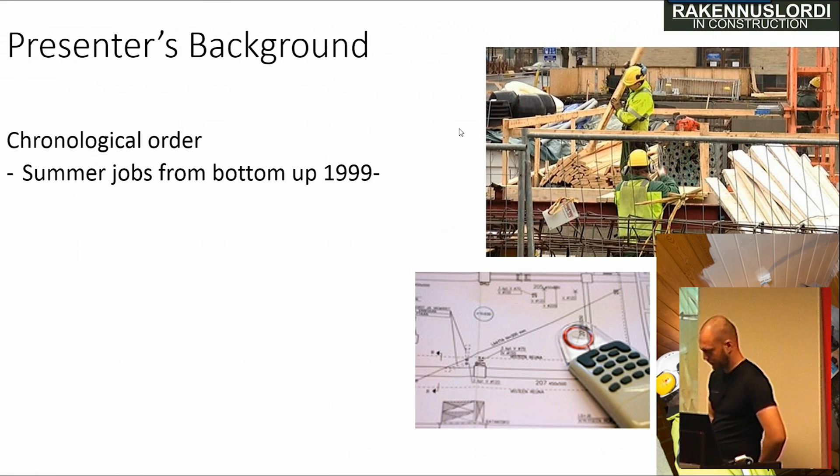So once I started studying to be a Master of Science in Construction in Finland, I used the first summer times to work at the construction sites in pretty basic tasks like construction worker, quantity surveyor, and eventually foreman. The next step was in 2003 when my professor asked me in the school, hey, tech student, are you in need of some pocket money? And obviously I was.

So two weeks after that I was creating and controlling schedules in this huge Kamppi Center project. Of course I didn't do it on my own because I just started. I had a good team to back me up, but I was the one doing the dirty work. So that's where I got in touch with Control Chart and the software that is now known as VICO Schedule Planner.

Next step was in 2005 when Graphisoft bought the company where I was working, which made the scheduling software. And so BIM, we made the first BIM pilot in Finland for SRV in Espoo. But in that we were only responsible for the BIM side. The guys at SRV handled scheduling and production management.

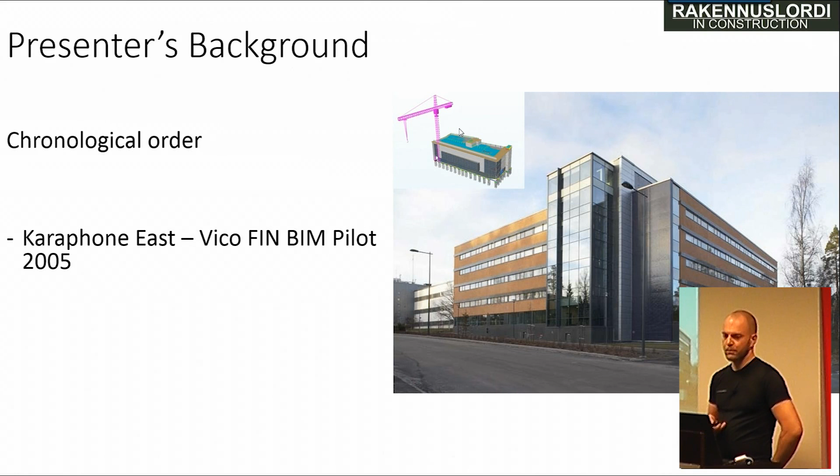Then I graduated in 2007. My master's thesis was about scheduling, and my special assignment, which is the next step down from master's thesis, was about BIM and utilizing it basically. After I graduated, I figured out that I don't want to be profiled as the technical guy who's clicking software, so to speak. So I went to real construction projects which are normal scale, normal size, and I was working there again in basic routine jobs as a site engineer and site manager and so on.

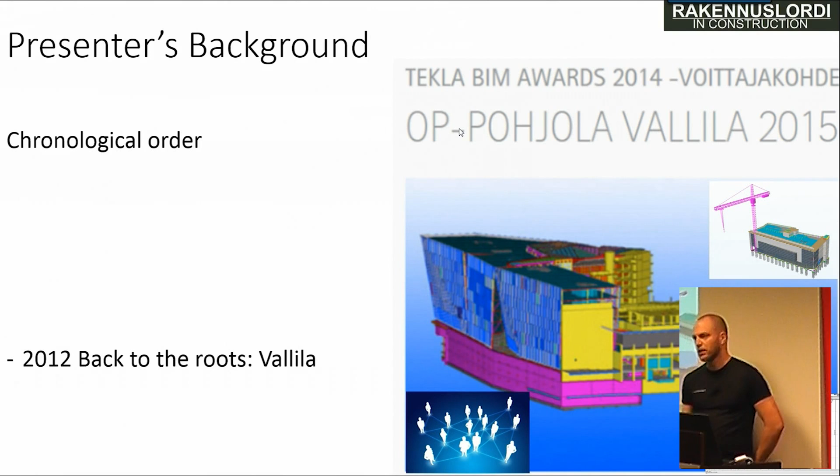So that took 5 years, and in 2012 I sort of came back to the roots in the BIM and scheduling scene and was working in this project, which you might know. I was the guy responsible for scheduling and BIM at the site. So pretty much everything that's done in the site is my handwriting and my colleagues'. And last summer I became an entrepreneur.

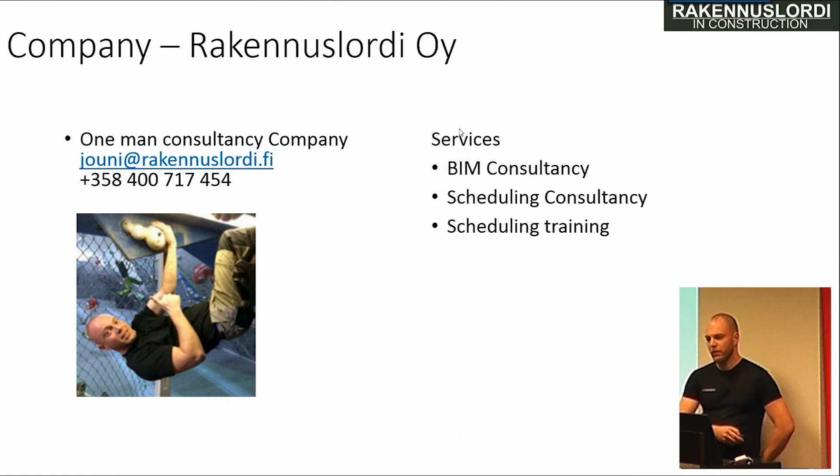And what I do today, the variety of stuff that I can do is a lot. And it all has to do with either BIM or scheduling or both. And when you combine these, it all boils down to information management. So that's, I think, where my work is going on now. And with the guys in my close circle, we've tried to figure out new ways and find new equipment to be able to more efficiently benefit from BIM and to be able to collaborate and communicate with people.

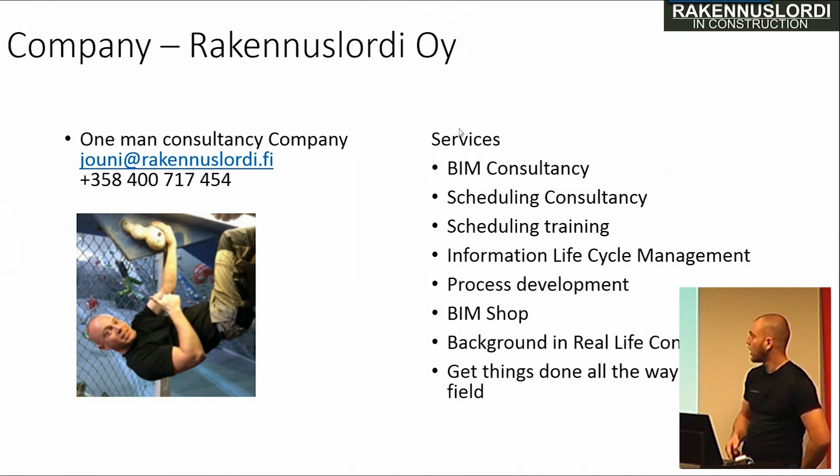And so in short, I have a constructor's background, which is different from pretty much every other BIM consultant in Finland. They are either designers by background or software company people. So I actually know what living in the site is. And my tendency is to make things happen to the very end. Make sure that schedules that we do will actually be implemented, not just leave them floating and hoping that maybe somebody else takes care that they will be done. So that's for the background.

And the contents of my presentation is pretty much showing real-life examples of how to do scheduling and BIM. And I'll also be using the Tekla house that you saw just a moment ago in Sampo's presentation, because it's simple and easy, and it's easy to make the point quickly. So let's start by getting people acquainted to our construction site.

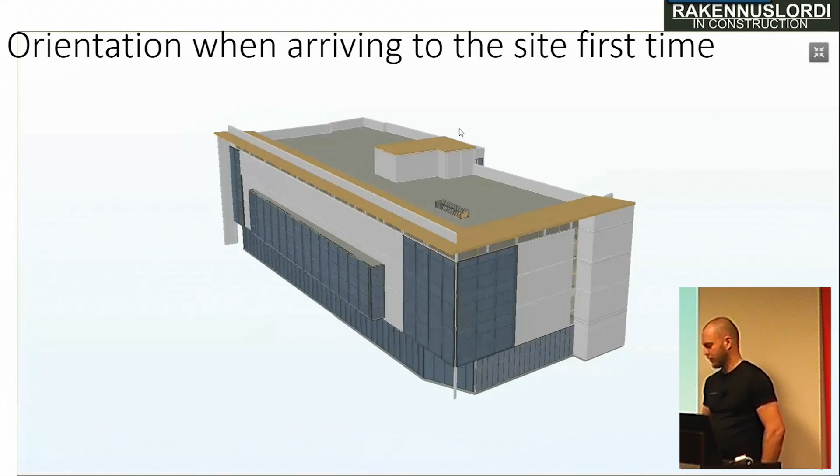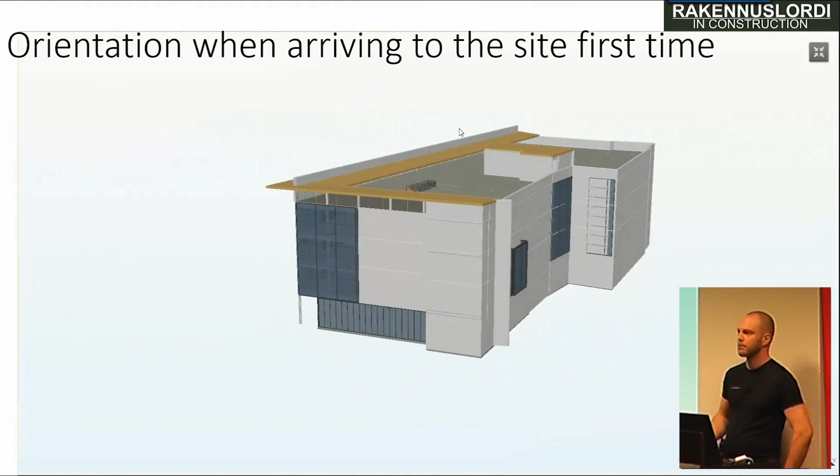Let's say a facade contractor, we've done the contract and the crew is coming to the site, and you should be able to communicate to them what the site is all about and where your work should be done and in which order. So you can either use 2D drawings or just explain and point at the site, or you can use BIM to make it transparent and obvious what we're building.

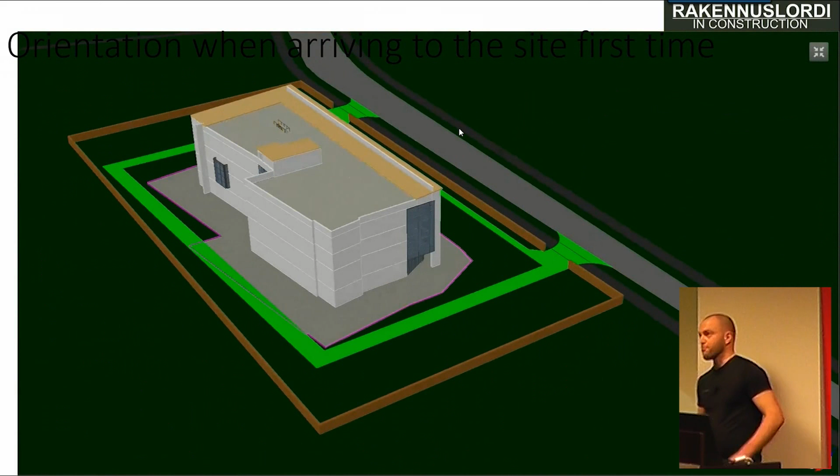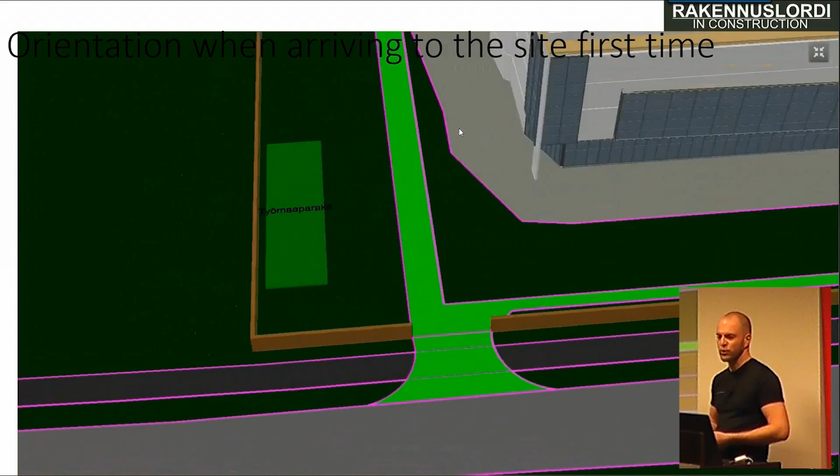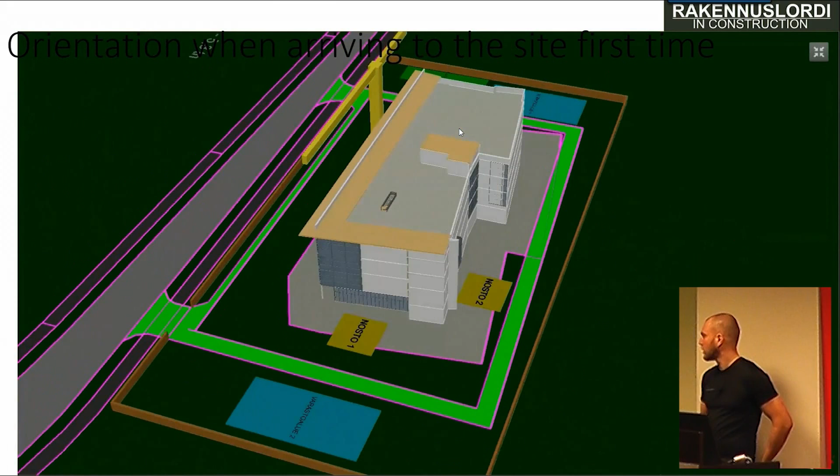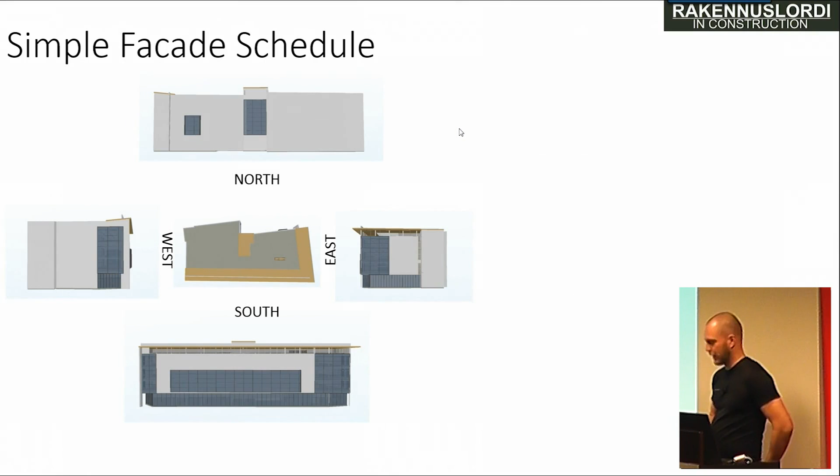So now that the facade contractor's crew know what our site is about, let's go through the schedule. That actually is the top view of the building that we just saw, and then you divide it into different locations to be able to manage your work. And then based on that, it's pretty simple to make a flow line schedule where you have the different locations here and then the order in which you're doing them.

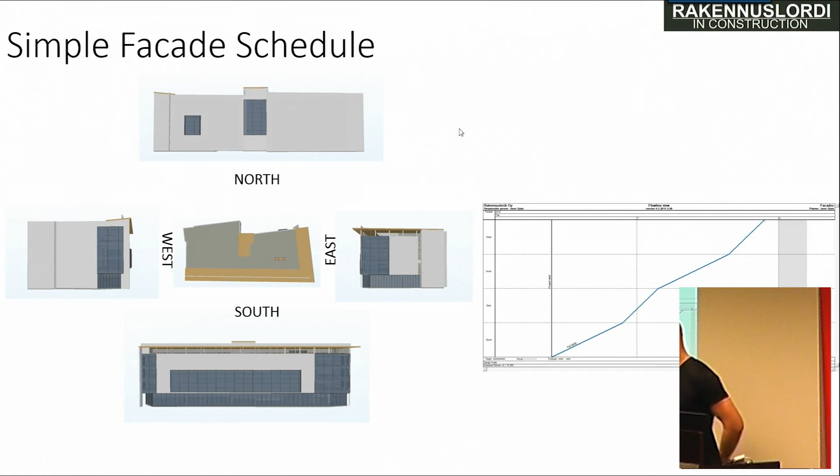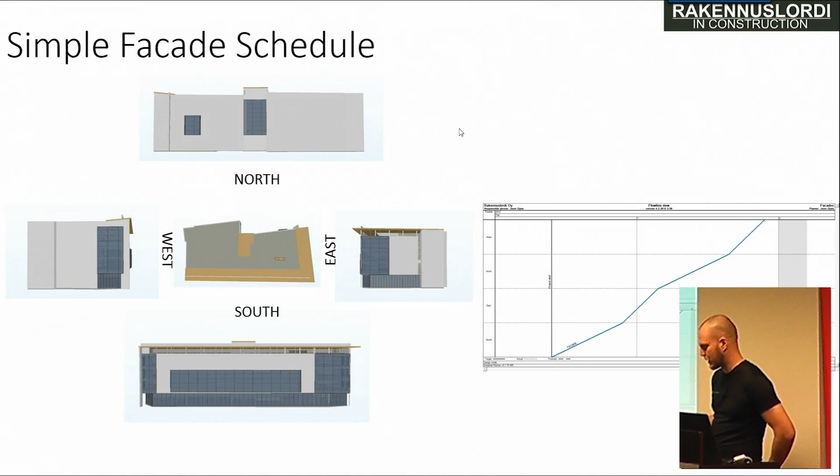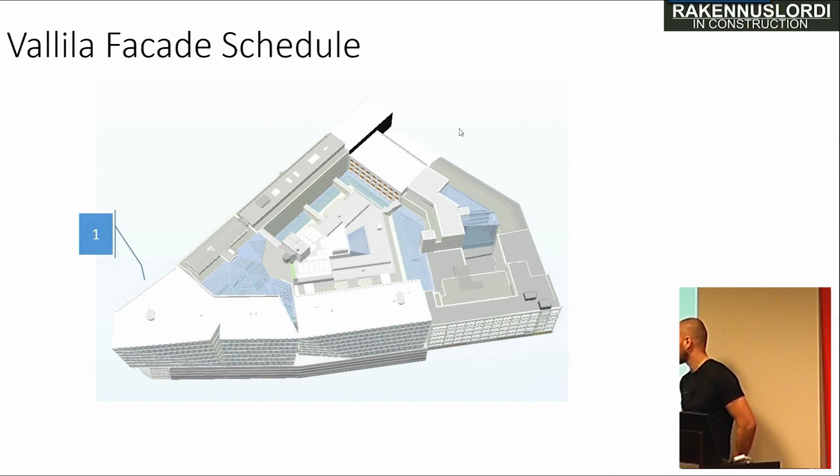And the production rate or the duration of the task varies because, well, the quantities in the facades vary as well. So that's the simple idea. Make the guys understand and explain, then it gets easy. So to the real life example, this is the Vallila site, and its facade schedule consisted of about 15 different facades. Let's see if I can get this working.

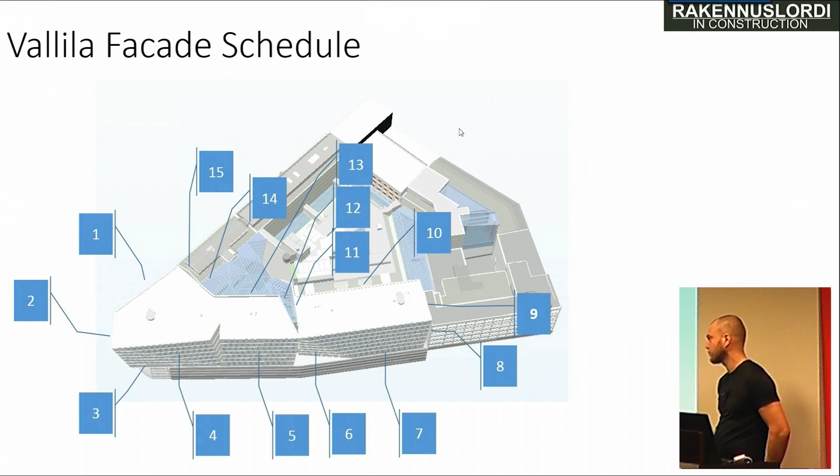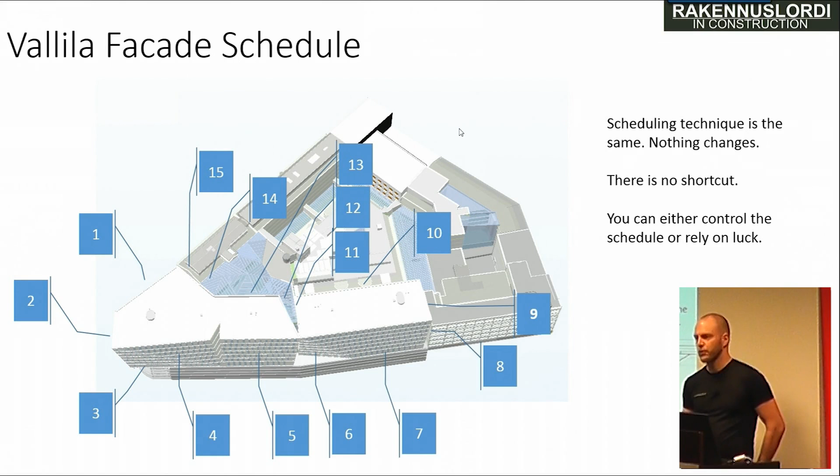So it's a lot more complicated, and the funny thing is that a lot of these facades are slanted. They are not straight, but they are leaning outwards from the building. So there you need special equipment to be able to work on the facade. So that's why, for example, here we have two. And then the schedule, how you should do it, there is no alternative or quick way around things. The mechanics, how you do it, is just the same, but of course the schedule will be more complex.

And at this point, how can you communicate this schedule to the guys who will actually do the work? Then the BIM model and the visualization of it becomes very beneficial. It makes things easy, and you can actually make sure that they understood the issues the way it's meant to be understood.

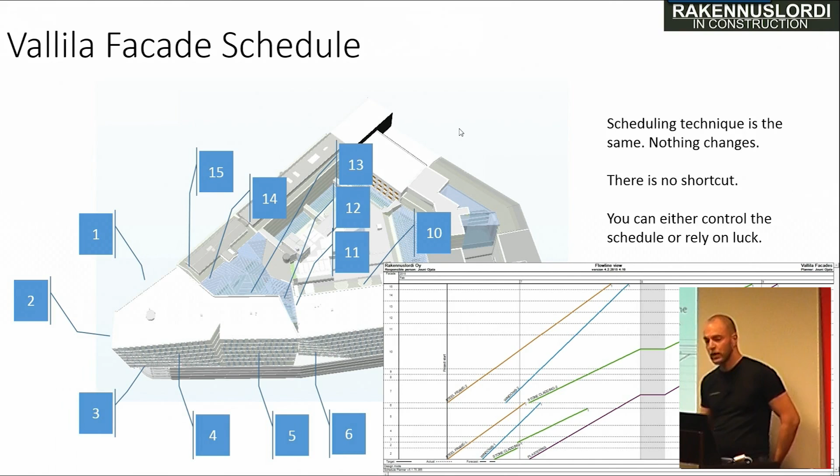Okay. Next, the scheduling procedure in this big project. How we did it is, well, by the books, as I like to say, according to the theory and according to how you should be using that control software. So it all boils down to starting with some quantity that your scheduled task is based on. Then you have some knowledge telling how many men achieve how much in a day.

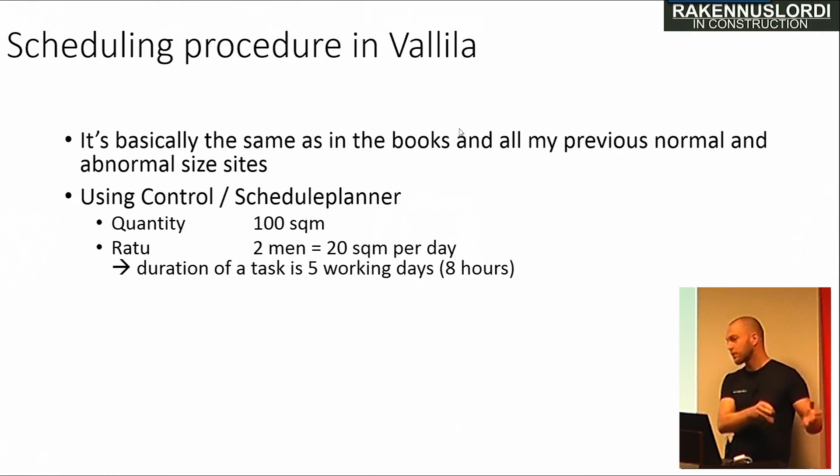For example, we in Finland have this Ratu data file system, which tells, for example, that for plasterboard walls you need 2 guys and they make 20 square meters per day. And that's how you get the duration. And the location is, well, the most critical thing in production control. Because only when you get one room done, let's say painted all the way, only then you can start installing carpets there, or otherwise you need to protect them somehow, and that again costs money and time. So one location at a time in a predefined sequence, and that's how it goes.

So this is what we did ourselves first, because at the start of the project we probably know like 2 of the contractors that will be working there. There will be 80 more, but the contracts will be made only a lot later. So we have to make the first guess of the schedule, even though I'm not an expert in electrical installations, for example. But still I need to figure out what kind of tasks the electrical contractor needs and how long they should take, and then I need to figure out some quantity the durations are based on. So that's how it's done first.

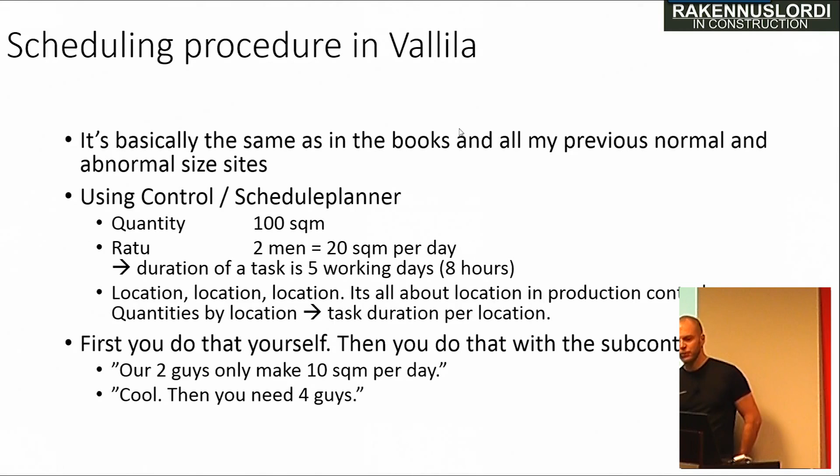Okay. Back to the whole project itself. It's a banking block owned by OP-Pohjola banking group, and there are altogether 10 buildings, of which half were renovated and half were demolished, and of course new buildings built in their place.

And the main parts of the project were the newly built houses on this side, and then the so-called gallery area. The whole inner yard was to be glazed with a glass roof all the way. And then last but not least, one simple building where almost every wall was straight. That was given to a general contractor to do sort of on their own.

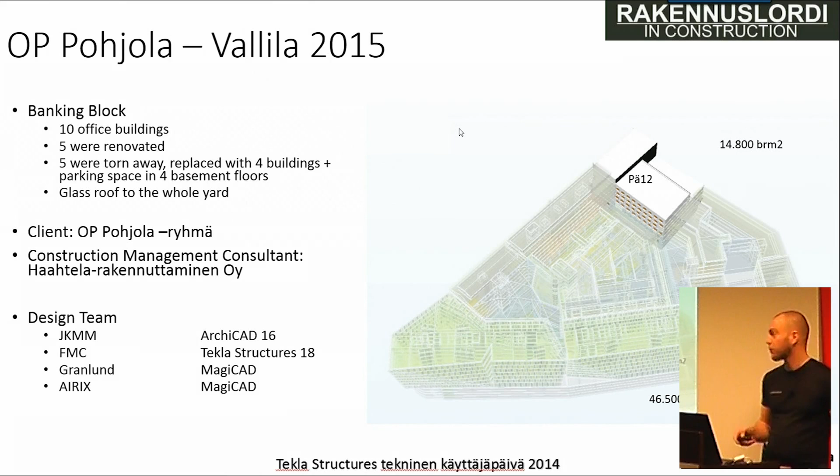So that's the project, and the design tools used there are the pretty standard ones that we use in Finland. And we actually used these ArchiCAD and Tekla Structures on the site as well for our own purposes, refining modeling at the site.

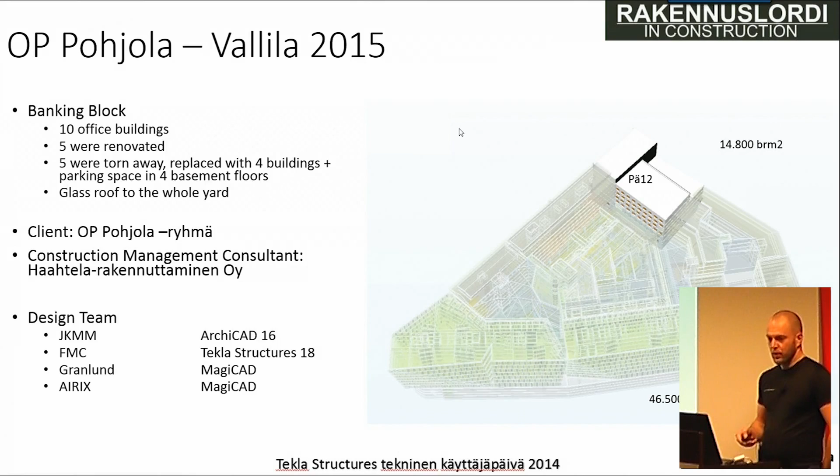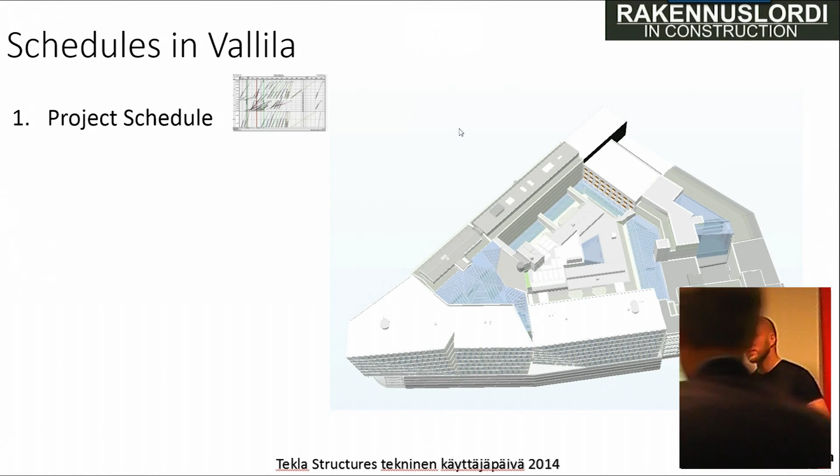So, how did we schedule everything? First of all, we started with, of course, the project schedule, which consisted of everything that's happening in the whole block from day 1 to deadline. And once we got closer to the moment when there will be hundreds of people and a lot of tasks going on at the same time, we needed to split the schedule into smaller pieces.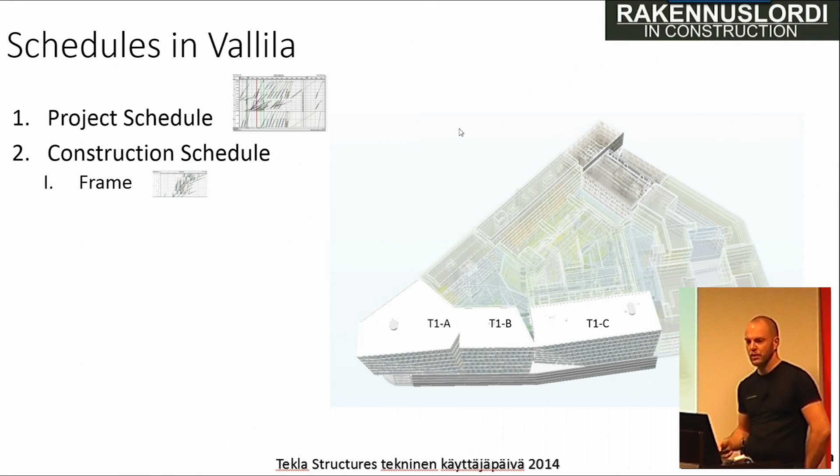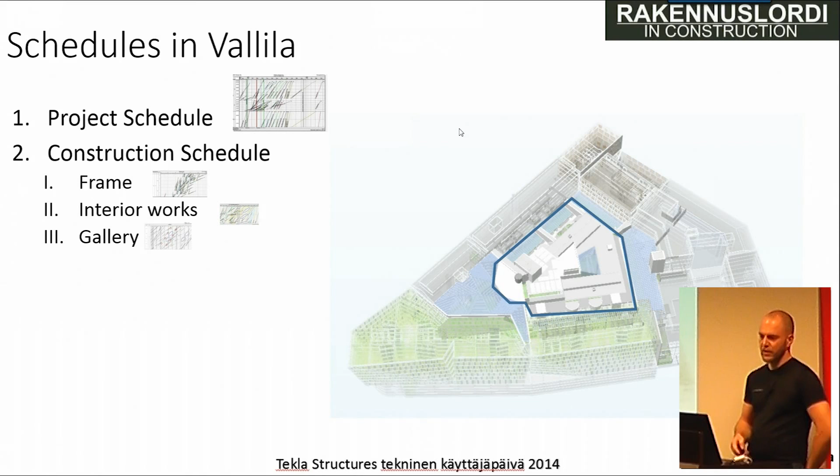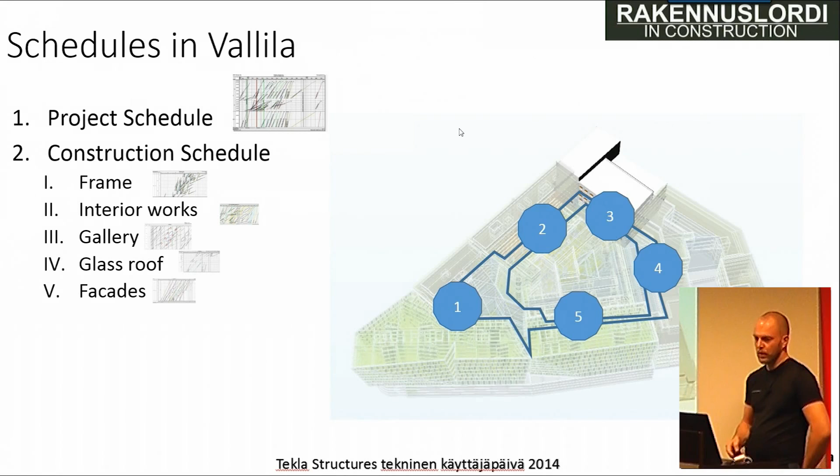For example, the frameworks of the newly built buildings, then the interior, which is obviously the same as in the frameworks, but we combined these 2 locations here. We did some calculations and figured out that it's more efficient to do it that way instead of doing A and B block individually. The gallery, we made our schedule for that, and the glass roofs as well, we split it into 5 different zones and managed it that way. And then again the facades, which you already saw. So that's pretty much how it's done.

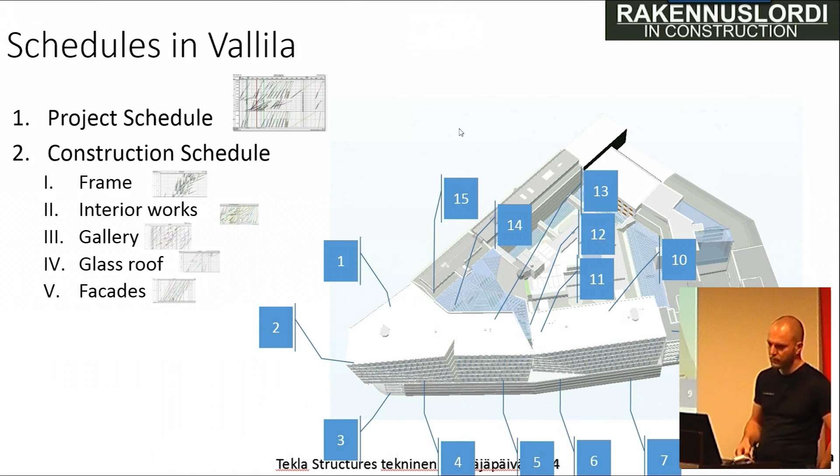It's beneficial to, as long as possible, have everything in one single schedule, because it means one file. And one file with control means that you can manage all the dependencies between different parts of the project inside the one file. And after you split it into many subschedules, these are separate files, and there still are dependencies between what's happening in the facade and what's happening in the glass roof construction, and those you need to do by hand, manually. So that's the split, and two reasons why to do it.

Reducing the file size: the site is so huge that, although we had efficient computers and everything was okay, being such a big building, there is so much data that it started to slow down in practical life. So that was one of the reasons to split it into smaller bits. The other one was that at that time I had my colleague with me, so we were two guys working on the scheduling and BIM. And once we had the schedule in one file, only one of us could work on it at the same time. After splitting it, we could work on it simultaneously.

And also when it's in smaller portions, it's even easier for me to actually understand what's going on and how dependencies work. But the downside is that you have to manually, with eye-hand coordination, make sure that everything is in sync. Because when you redefine something in the frame schedule, it most certainly will affect pretty much every other schedule as well. If there's a delay, it will show in the other schedules as well. So there you have to be quite precise to make sure that everything is synchronized.

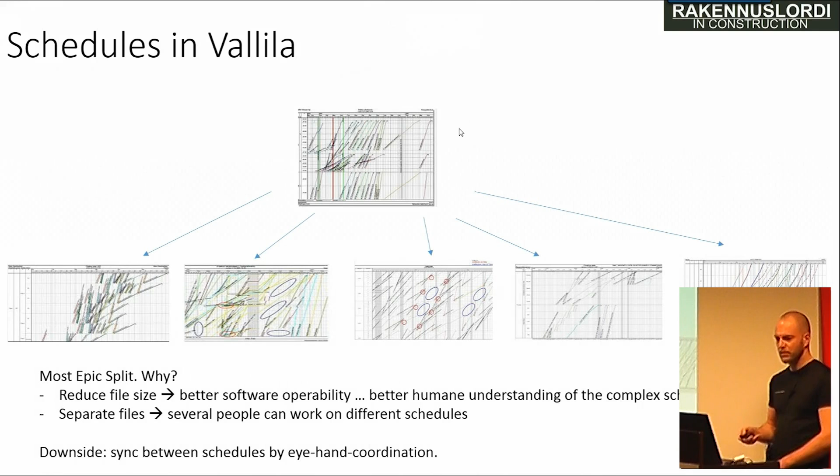Then, scheduling is of no use if you make it for yourself. It only helps if you share it with the right people. The guys on the site are the ones who need to know what they need to do and when. And you need to control it rigorously. So first of all, you have to, of course, know the schedule and be able to communicate it to everyone applicable.

And when you're controlling the schedule in a systematic way, you not only know exactly where you're at now, but you can also calculate, the software calculates it for you, that if we continue working at this pace, where will it take us? If we're running late, what will it mean next month? And so on. And it all boils down to leading people who actually make things happen.

So, how did we handle schedule controlling? We had all the different schedules divided, and from those we printed out control charts for each and every contractor. The control chart is another way of putting the schedule. It has basically the same information as in the flow line, but in a different manner for easy controlling. So basically, the contractor himself always knows, okay, this is my schedule, and when they report it, they already know where they're at compared to the schedule.

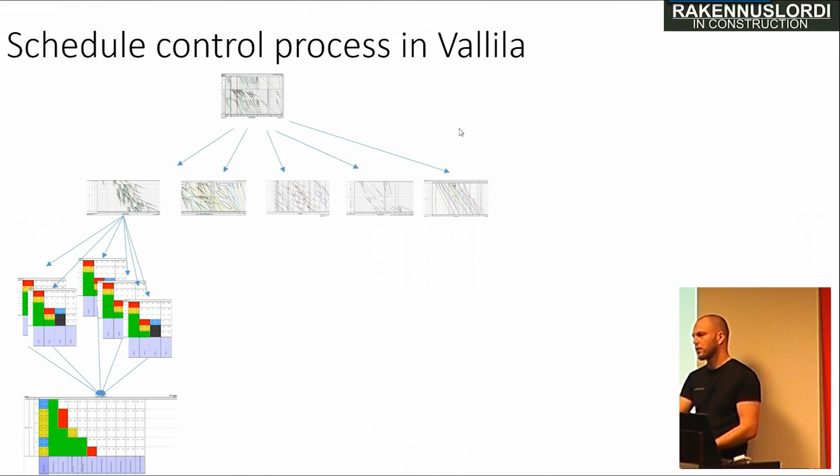Instead, if you compare it to the more traditional way, where every contractor has their own paper on which they report percentages, they often lose sight of where we are compared to the schedule. So we deal out the charts, and then the guys give them back the day before the site meeting, once a week, and that's how we form the big picture for the whole project, from small bits that are based on real information.

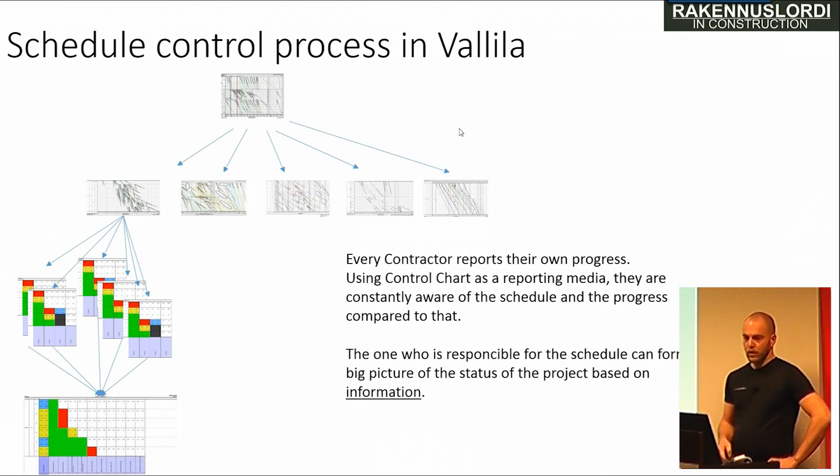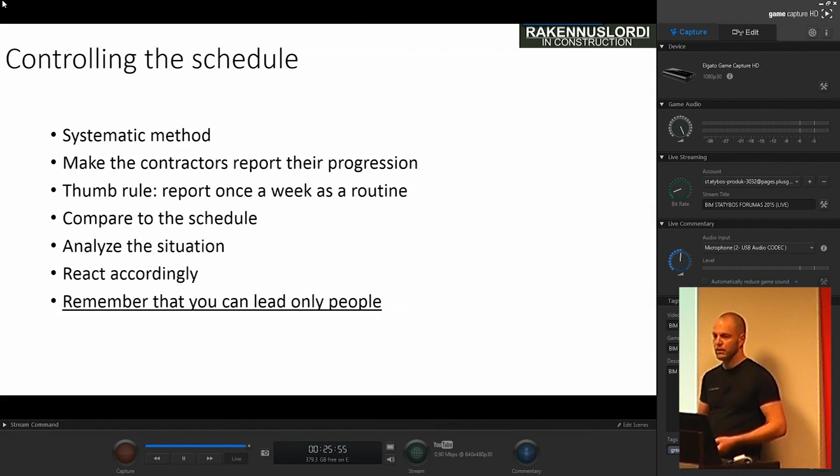And again, some bullets about controlling the schedule. Systematic procedure is the most important thing, and once a week is a good thumb rule for any size project when to control it. Because if you update the control charts once a month, there's 3 weeks of time when things start going south, but you only figure that out after a month. If you do it once a week, you can only lose like 2-3 days of valuable time, and then you can start managing and controlling based on information.

And also, you should know how to react to some troubles. Not all require attention, small things, but some others can escalate into bigger issues, and you need to know it. And you can find it out by, well, doing the controlling. Right, so that's the scheduling part for now.

So let's go through some Tekla examples. This probably overlaps a bit with what Sampo just showed, but well, these are real life examples. So let's start with the factory capacity. In our project we had a huge amount of steel frame. There were the actual buildings there, and then the whole glass roof sections, well, let's just say that there were a lot of steel structures there. And we needed to figure out somehow: can we give the whole steel works to one contractor? I mean, can they manage it in time? And well, thinking about this afterwards, I guess there's really no other alternative to figure it out but to, in this case, use Tekla.

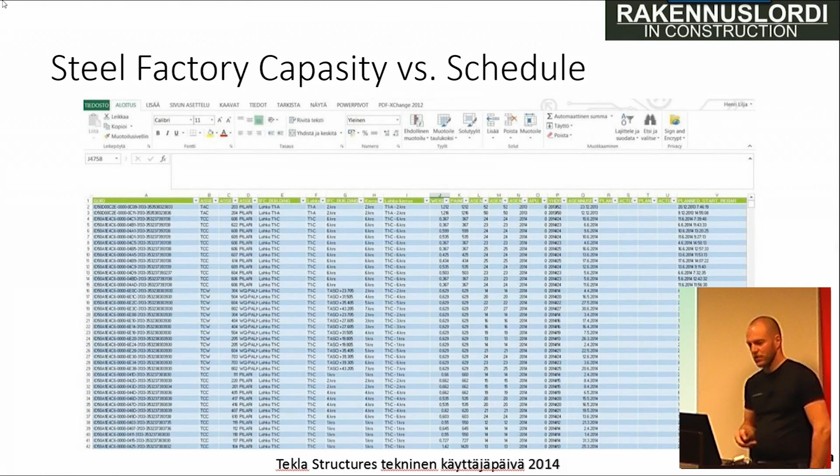But still, we made the decision that yeah, we'll take the one contractor and push design so that they can produce. I mean, use this downtime here to produce steel components well in advance. So there.

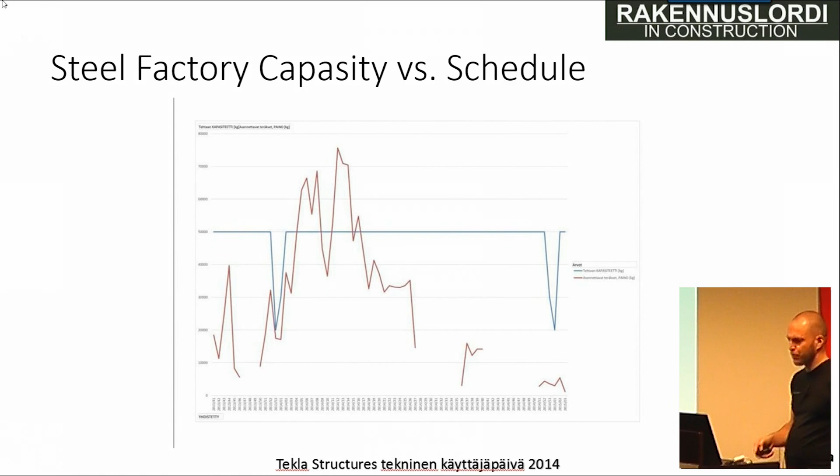Another issue is about updating the factory status. Let's go back a bit here. So in order to know if the factory is producing enough steel, well, we could use the Excel, which is long like hell, and it's pretty hard even for the guy who's actually managing it to form a big picture about how we're doing. But if you highlight the stuff in the model, it becomes very simple and effective. Anybody can, when they see the model, see that these are green and those ones are red, meaning that they are not done yet, and if I know that I should start erecting the frame next Monday, then I can mention it, because otherwise if it wasn't shown in the model, there was no way I could know what's the factory status.

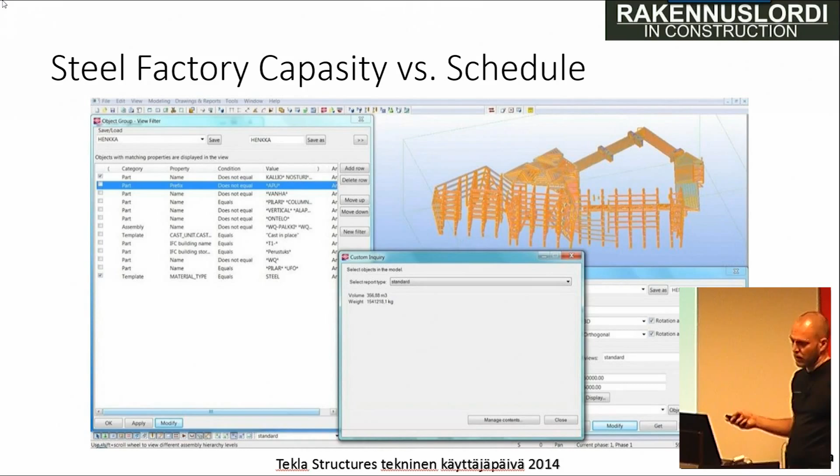So the idea was such, and how we actually did it, how can we know what's going on in the factory. In this project there were 3 factories providing precast elements to the site. One was obviously the steel fabricator, and then there was one concrete factory that was delivering precast wall elements, and then the third one was making the slabs.

And this example here is from the steel fabricator's reporting Excel. They used Excel for themselves already, so it was a pretty easy task for us to take the Excel and modify it just a bit, so that when we get the update, we only need to copy paste the stuff directly into Tekla. So that procedure took about 20 minutes per time, and we did it once a week if there was no other need to do it more often. So that's for the steel factory.

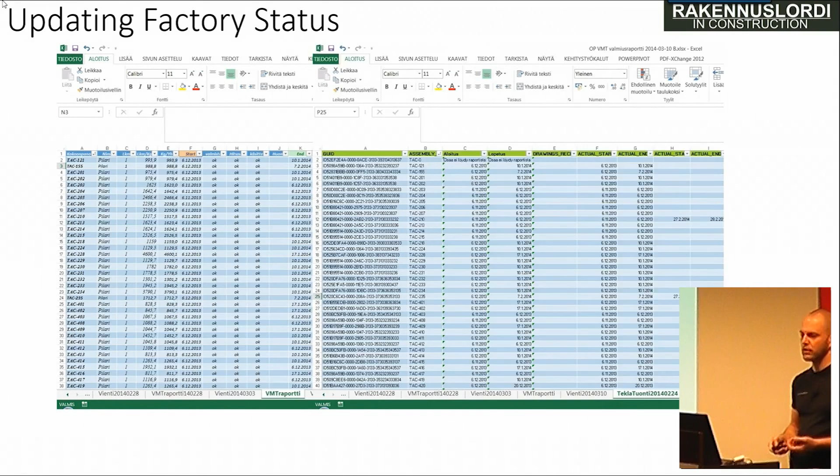The concrete wall element factory also used Excel to report, and we did the same drill there, modified it a bit, and got it to the same track that took 20 minutes to update the status.

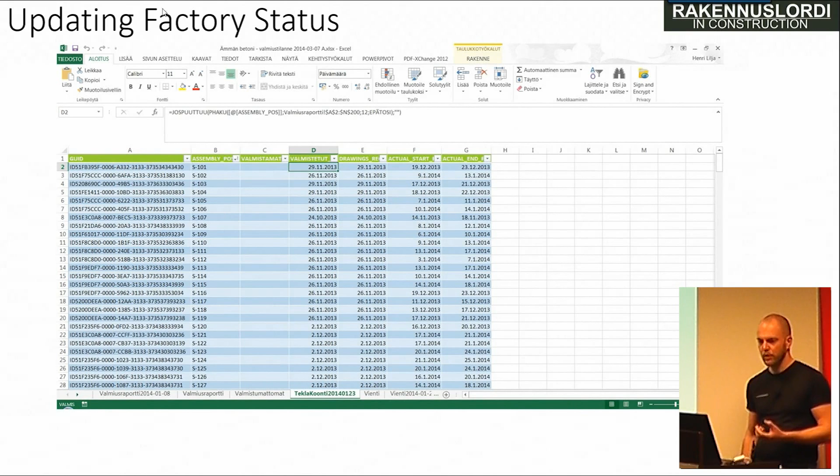Last but not least, this Parma factory in Finland uses Tekla to drive their slab making machines, so they don't need drawings to make the slabs. They just need the model, and then they can drive their machinery to actually produce it, almost like pressing a button. Since they were using Tekla, they could just push the status information into the cloud, and at the construction site we could press one button, and it took a minute to get this data up to date.

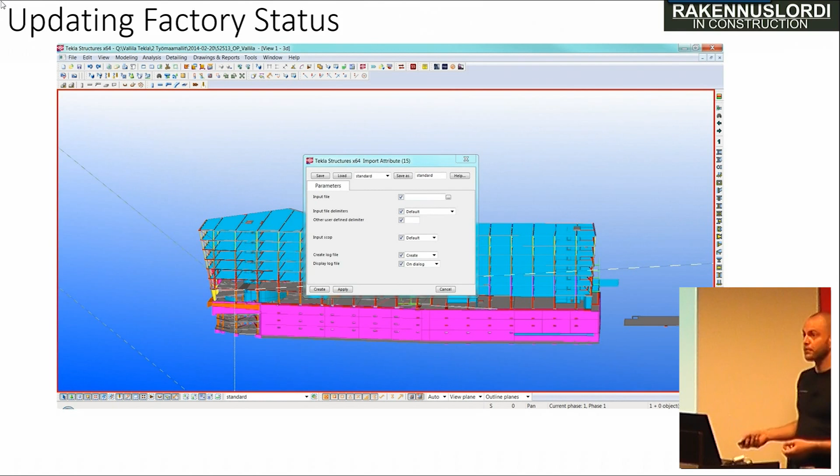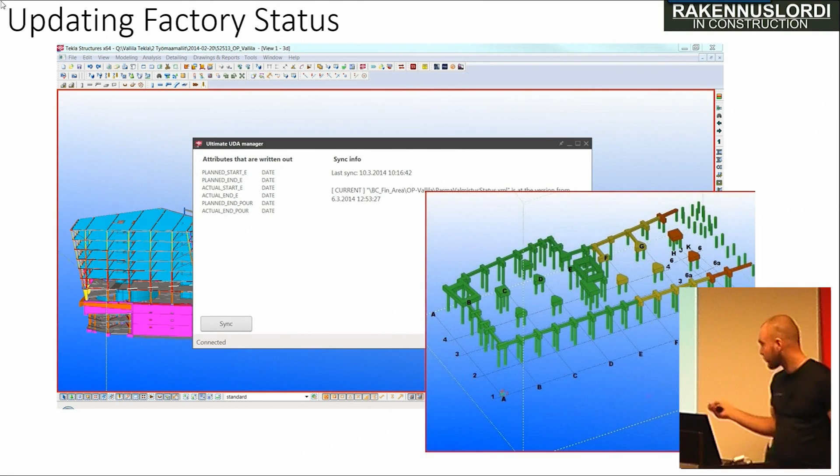It took about an hour from my colleague Henri to do this routine every week, and when doing it, everybody on site knew the status, because it's so obviously shown. Very simply, the idea is these are footings, but the color coding issue is still the same. Anyone can see that the green ones are done, that's good, the yellow ones are under construction right now, and with the red ones we're running late or we lack drawings or something. It becomes self-evident.

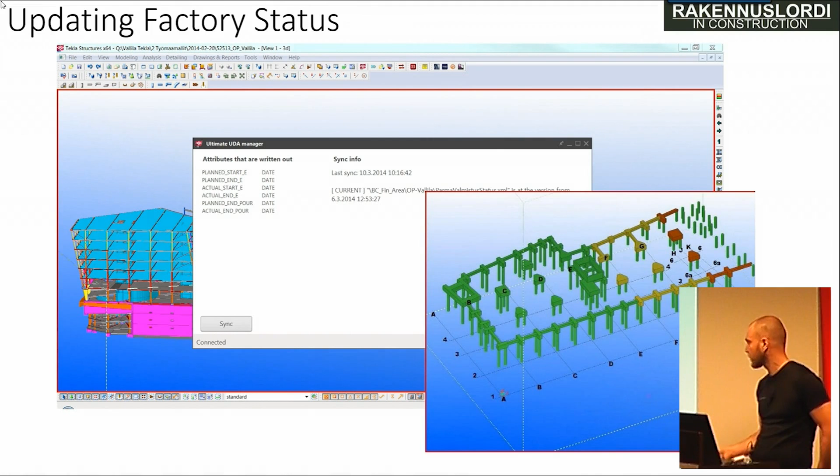Okay, then to combine these two, how to use BIM to visualize schedule issues to various people. We'll start off with the very early phase project schedule. The schedule is so coarse that it says only that this building framework will be done at that point and internal works after that. So it's very rough scale.

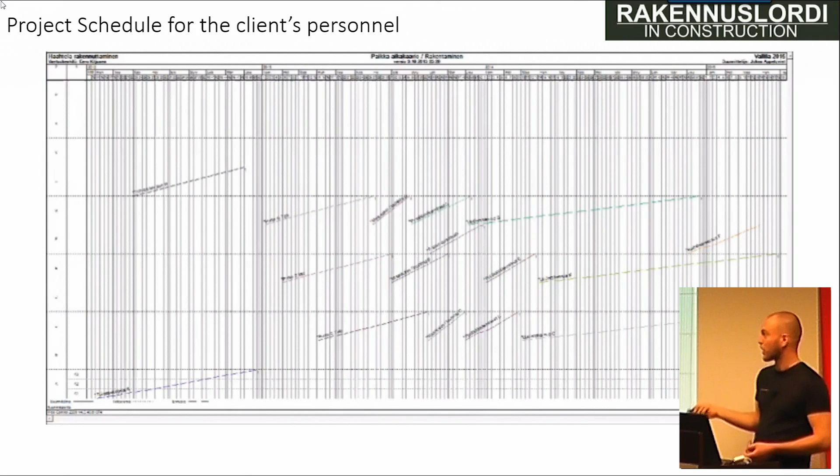For us at the construction site, this doesn't make much difference, but for the people working at the block, it makes the world of difference, because there were 2,000 banking people working at the site normally, and you can imagine what it's like when we are tearing down 5 buildings around them and then starting to construct. No one of the banking people can understand what this is about, but this they can understand. Simple color coding, what's building and what's renovating and so on.

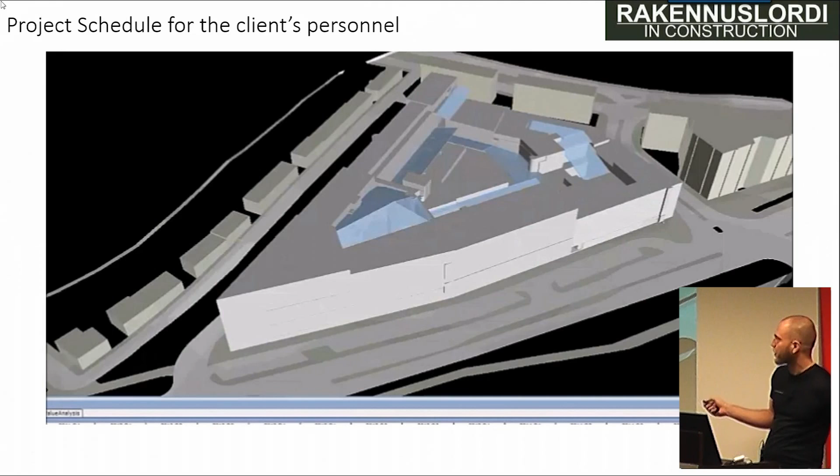And using this makes it again very evident. Of course, this is just the raw video, but when you put months and dates there to show progress, then it is actually usable. So that's large scale for normal people living there.

Then for our purposes at the construction site, we also used a similar kind of tactic. This is a schedule of the demolishing phase and the new build phase. The trick here is that we tore down 4 buildings and then built 3 in their places, so obviously they don't fit into the old holes, so to speak. That means the location breakdown structure changes in between demolishing and new build.

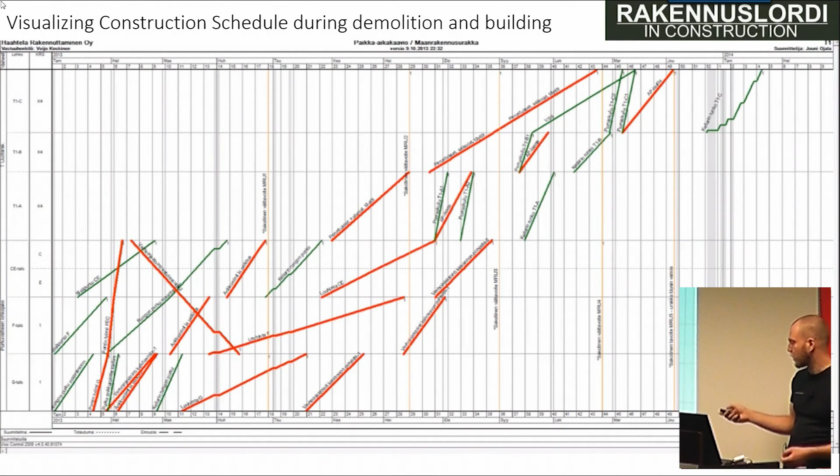Even for me, and especially for others, it was very beneficial to make this visualization very simply by just using Tekla BIMsight and manually selecting what's visible and what's not. Month by month I could make it so that I even understood and was better able to communicate what happens.

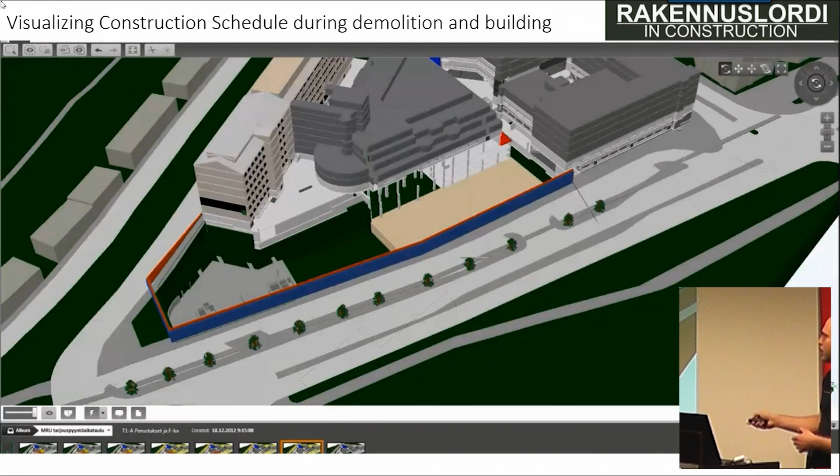The most important, interesting places were, well, when you're demolishing a 10-story house and then you should already be starting to build the one next to it. So what happens? We need 20 meters of area there for protection during the demolition and so on, and also the interface between the structures that will remain and what will be built new - those were the interesting ones.

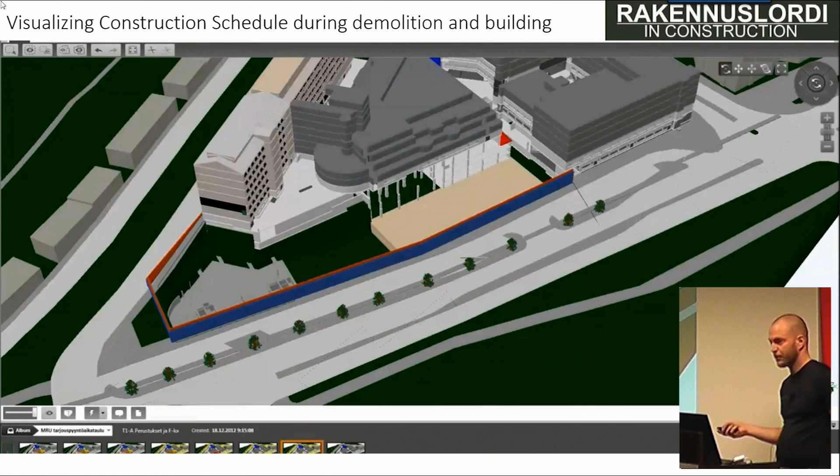And visualizing it this way made it easy. You can only imagine taking a look at floor plan views of the old building and then the new, and then trying to compare and figure out what's happening.

Okay, then the next phase: daily production management. We had the habit of having 2 schedule meetings a week, on Tuesday morning 7 a.m. and Friday morning 7 a.m. - a 15-minute quick meeting with the key contractors. We agreed on plans for the next 2 to 3 days. For example, if there's a concrete pouring day, it means the yard is pretty much jammed because there's not much room, so we need to synchronize what everybody's doing.

Well, first we used just plain 2D drawings to mark up with the PDF which part of the site is assigned to whom on which day.

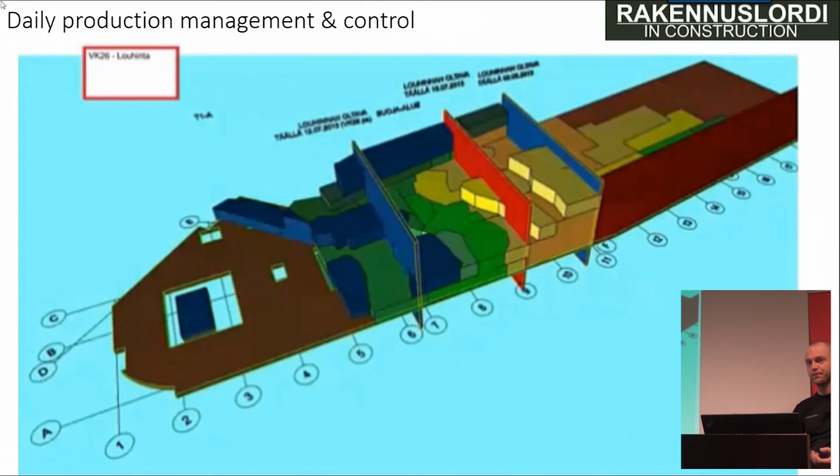And when we got further, we figured out that the rock blasting isn't keeping up to schedule. We know it because we can monitor the blasting documents - it's an estimate, but a very accurate one - of how much will be blown with each blast. So we knew by square meters, by cubic meters, that we were falling behind schedule with rock blasting, and we couldn't get any kind of answer from the contractor. We needed to know: okay, we're falling behind, how much are we going to be behind when this is all done? And they couldn't answer. It was just, well, let's see where it goes.

But still, we had to manage the whole project schedule. For example, internal works - we had to start making contracts and tell contractors when things would happen. So to grasp some idea, we used our tech student who was on a summer job there. We made him simply model the rock surface using sort of a Lego block ideology, where every block is the shape and size of one blast.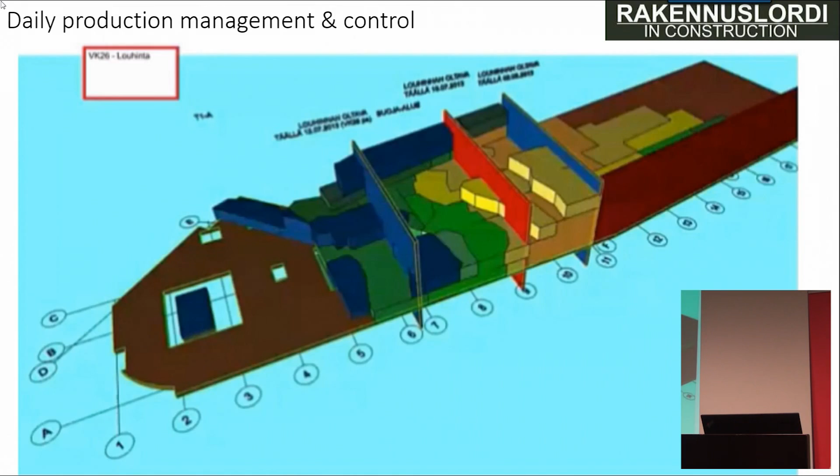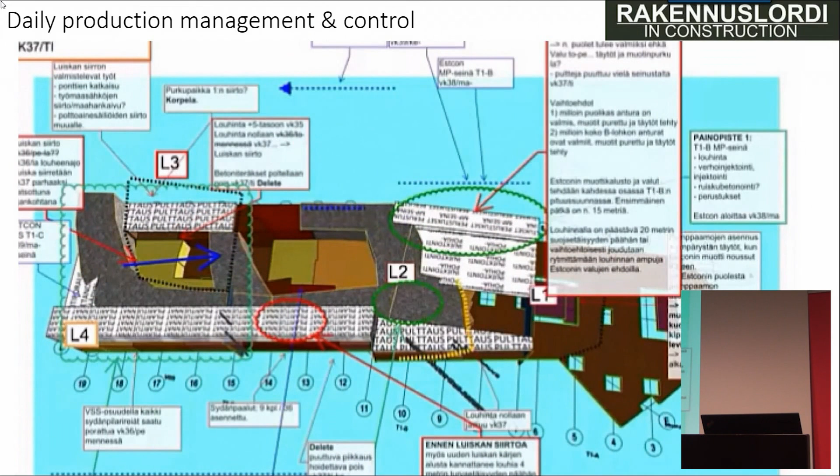That's how we could make some visualizations or guesses about how it could be done, and probably in what time. Once we did that, we figured out, okay, let's use it in the daily planning, because it's a lot more visual than something else. So we took it a bit further and started to use the 3D view for easier communication.

And once we started getting new construction done, that status information was pretty easy to show people and plan ahead.

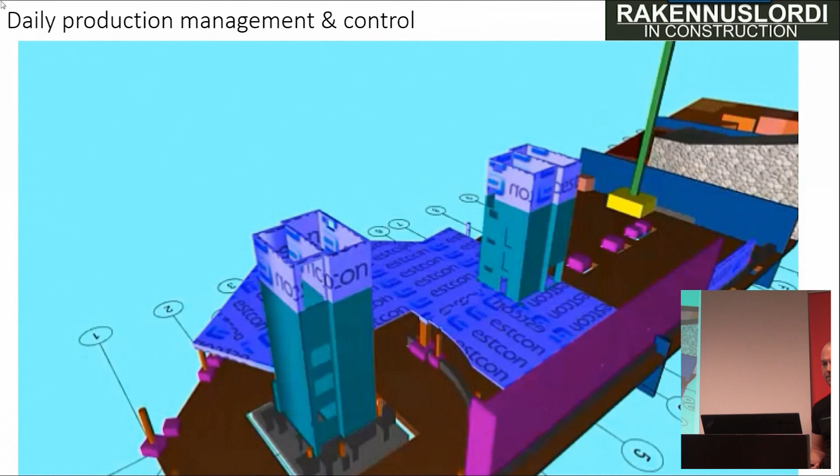So this related to the rock blasting contractor. In the end, rock blasting cost us 3 months extra time, which was a lot because we had like 2 years to begin with.

But anyway, we figured out how should we react to it - what's the correct amount of effort, time and resources to push something so we get back on track with the schedule? So we came up with the Pohjola's formula. It's shown pretty badly there, but the idea is that we need some amount of money to tell us what a day costs on the construction site.

So we took the project's whole budget, then the average personnel cost per month for the construction management guys, which was about 40,000 euros I think, and divided by 2 to get the arithmetic average, then divided again by the rest of the days we have left in the project. And there you get some value.

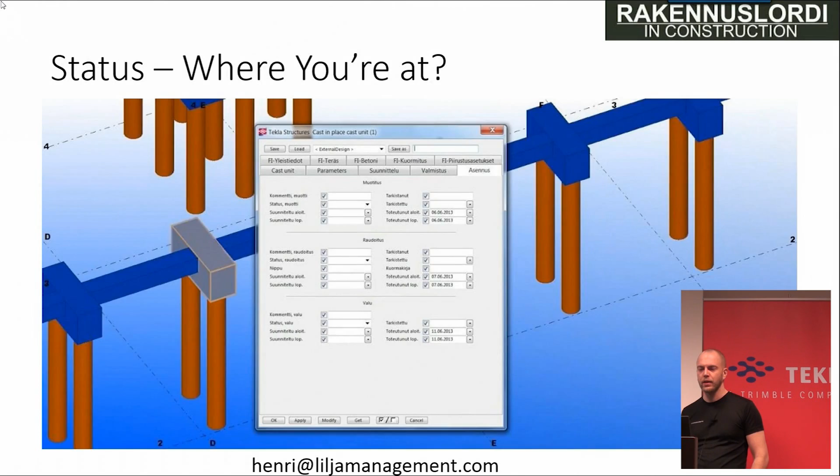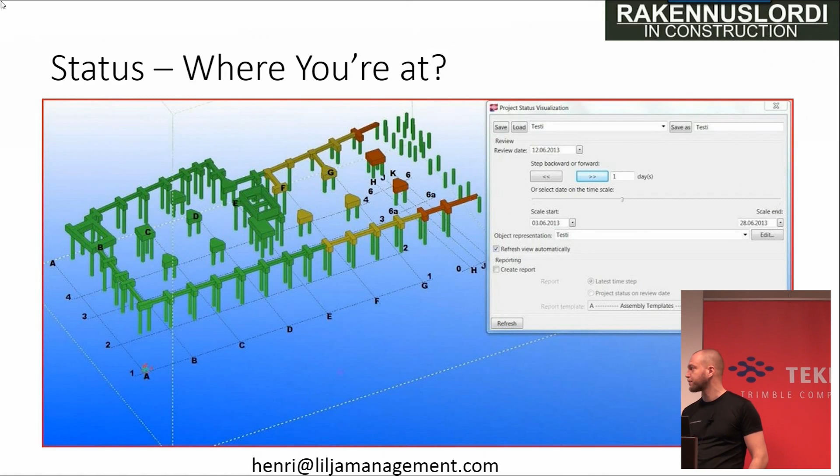So let's talk about status information again. We went through it in a couple of places where visualizing the stuff is pretty important and makes discussions simple. Using these, I'm talking about the same thing as the contractor or other subcontractor. If there's two guys talking about things without the model, it's very easy to actually be talking about two different things. This makes it pretty easy and obvious.

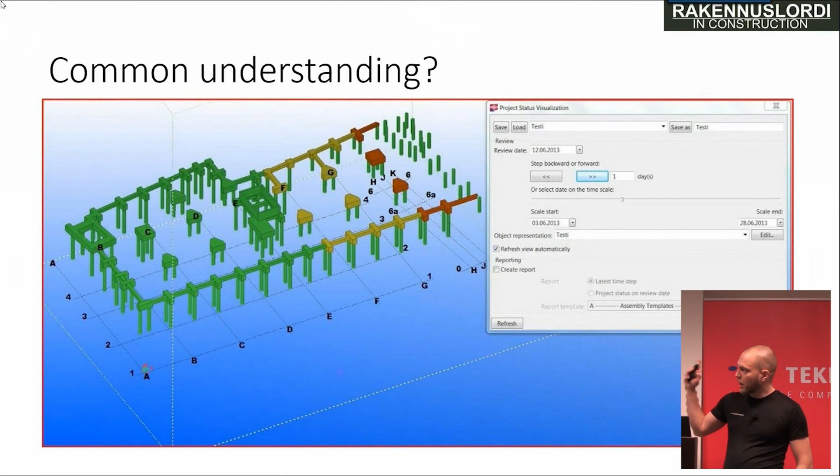So that's important. So this common understanding, how do you formulate it? That's pretty comprehensive, but if we go back to the old ways for a moment, let's say we are in the contractor meeting where everybody reports their progress, and let's say we are not using control charts.

So basically every contractor has their own paper where they usually tell percentages. One guy might say, okay, we've done 50% and the next 15 are under construction. Great. But the scheduling guy might be interested in whether we are on schedule performing this way. And then the usual answer tends to be, it's his fault because we're not in time.

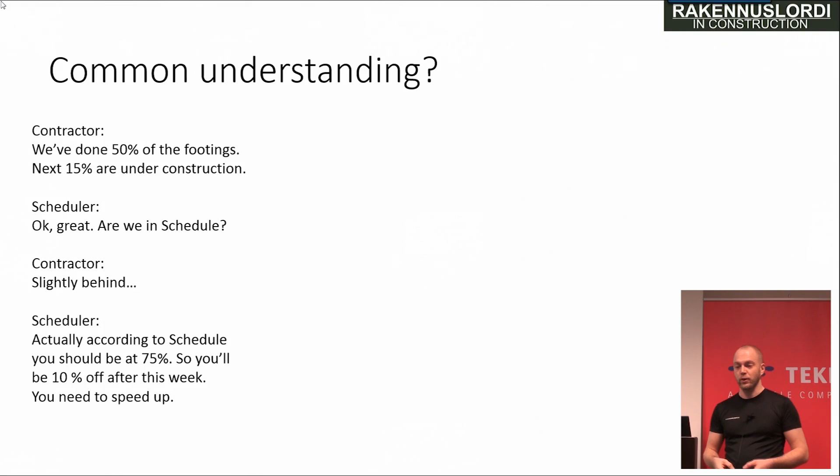No matter how you made your schedule, it's pretty easy to pull out percentages because you have this line, even if you have a Gantt chart, and today is here, and it's about 75% to here. So you can tell, okay, we're falling behind, and after this week we're like 10% off, you need to speed up. And then the contractor says, yeah, we'll do it, or give it our best effort, without knowing actually what they need to accomplish, because making the 10% is a bit too abstract on the site.

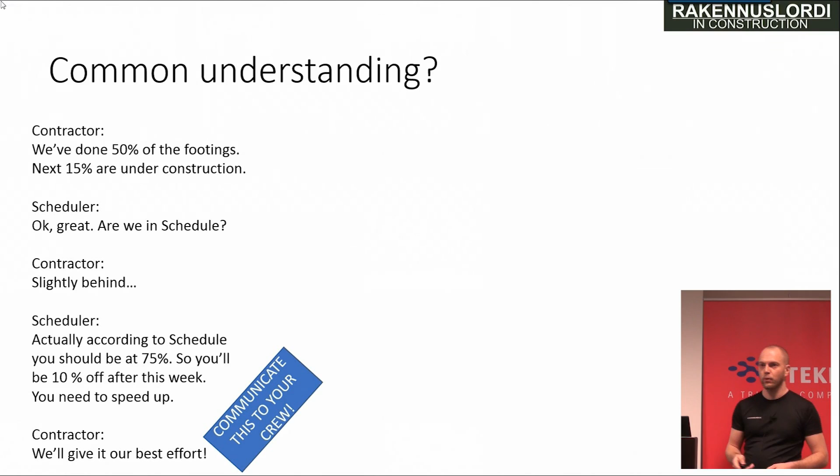And that's when communication becomes pretty easy. Talk to the guys themselves, okay, you have like 5 footings and a couple of beams, what do you need to make it on Saturday? Then they can actually answer and decide, yeah, we'll do it.

So that's common understanding. It really reduces waste when you're coming again tomorrow to look at the site and tell, hey, this isn't what we agreed on, and the other guy says that it is, or at least that's how I thought it should be. Using this eliminates a lot of that.

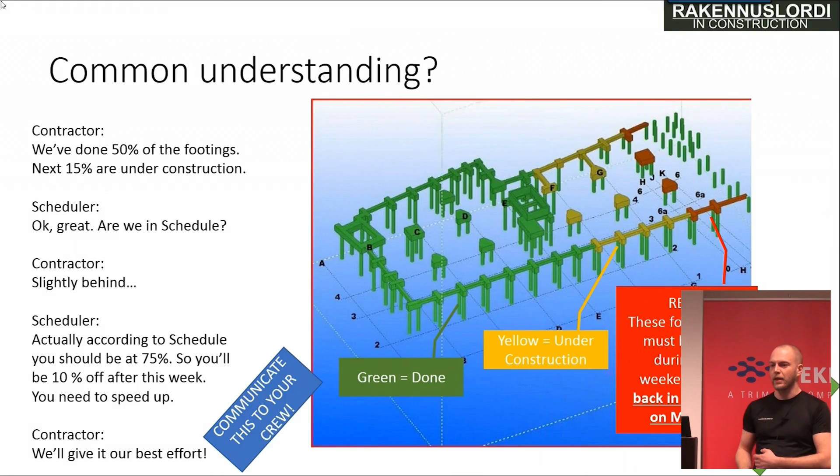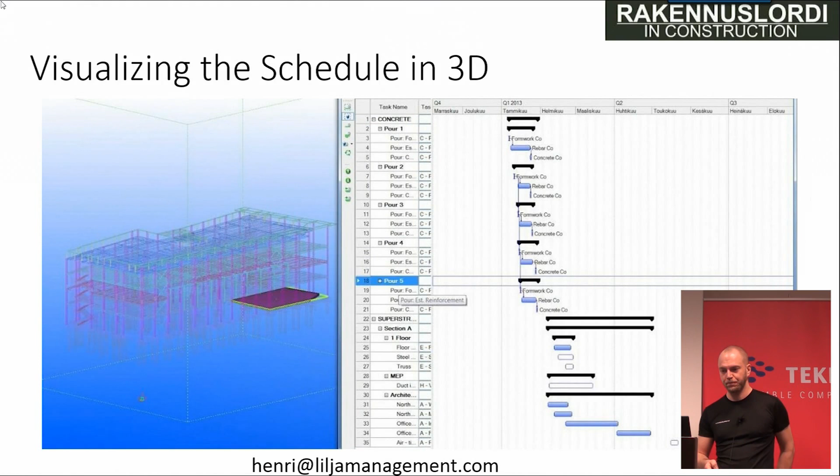Okay, so let's go to schedule visualization. It's again pretty simple to show comprehensively for, let's say, the concrete floor pouring crew, where they should be at, when, and in which order. So that's very simple. Now this is an example from my friends at Sweco.

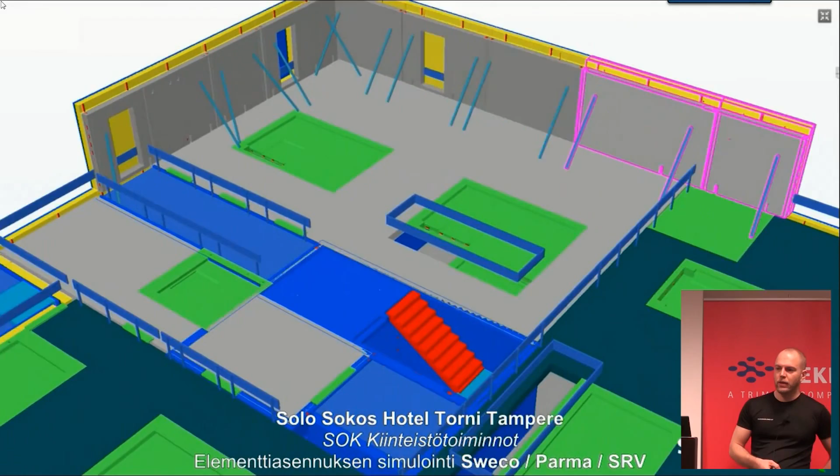This is a hotel tower construction site in Tampere, Finland, and they took this pretty far. The hotel is 27 stories or something, I guess one of the tallest buildings in Finland. We don't have many tall buildings, but anyways.

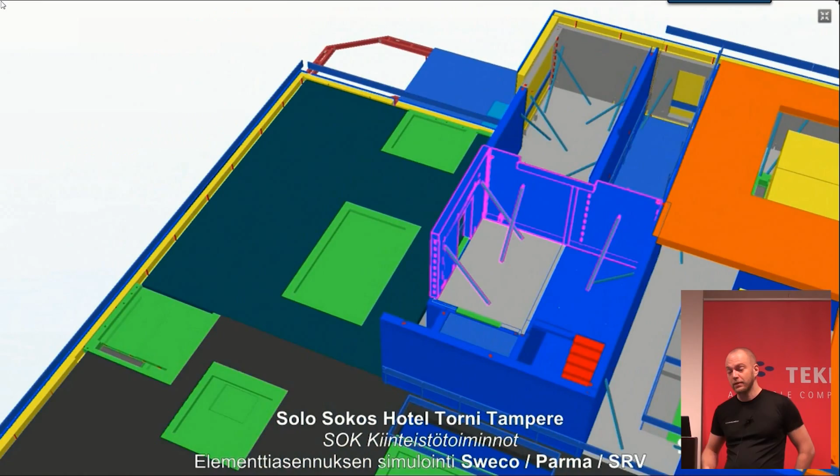They didn't visualize the schedule with the model because they knew they had 1 week per floor that they had to make happen. So instead of using this to visualize the schedule, they actually figured out using the model which bits and pieces needed to go in place so we can get it done in a week. I think that's a very cool way to approach the problem.

All right. So next is pretty much about me and what I do nowadays. So the idea of utilizing BIM is a thing that will benefit you cost-wise, and it'll benefit you to adopt it. And for that, for example, you get consultancy from me or many other operators in the field.

But the next actual big step is to be able to collaborate with people at the site, and for that you need new equipment. You can check out the website later, but we are doing work figuring out, now that we're managing construction sites using BIM, what are the correct tools to be able to collaborate. That means getting the guys from the site into that kind of office and being able to work on and brainstorm the problems we have. So that's really when it starts to speed up, and that's a way to get the BIM all the way down to the field.